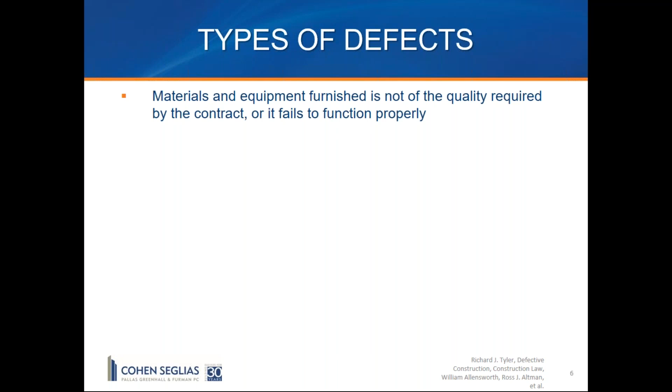All right, so the first piece, what is a defect? We found 5 general categories that we thought capture the different types of defects that can arise. The first type that we saw are materials and equipment furnished is not of the quality required by the contract, or it fails to function properly. So to give you 2 examples, we had a case where there was a performance spec for a HVAC system. When it was finally installed by the contractor, it did not maintain consistent temperatures required by the performance spec. That would be a defect.

Another case we had involved a sewage pump that had to have a certain amount of suction. When it was installed and supplied, it did not have that suction. It was a defect that failed. It was a construction item that did not function properly, and it did not meet the quality required by the contract.

Second type, work is executed in a defective manner. Simply, it was not performed properly. Example of this, floating wood floor. If you're familiar with that, it is not supposed to be affixed to anything aside from the floor itself. Otherwise, it's not floating. Nailed to the subfloor, the opposite of a floating floor. That is just simply defectively performed work.

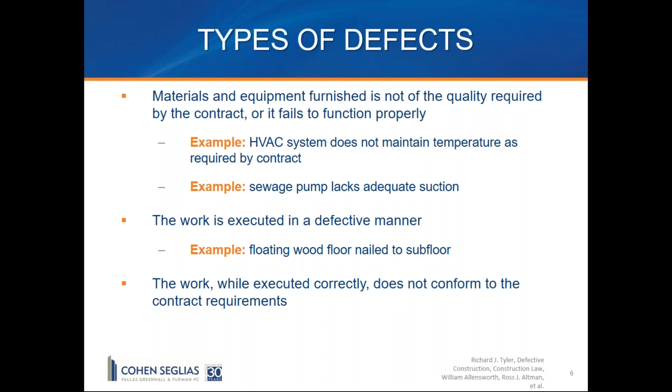Third type, the work, while executed correctly, does not conform to the contract requirements. Kind of abstract example for you. PVC pipes for plumbing. They're correctly installed, they work, however, the contract documents call for copper pipes. I currently have an active case right now where the specs called out for CPVC, and the contractor went and installed PVC. And we'll touch on the implications of that later, but as we sit here, the project and the system is functioning properly, but the owner and the general contractor did not get what they bought. So there's implications that arise from that.

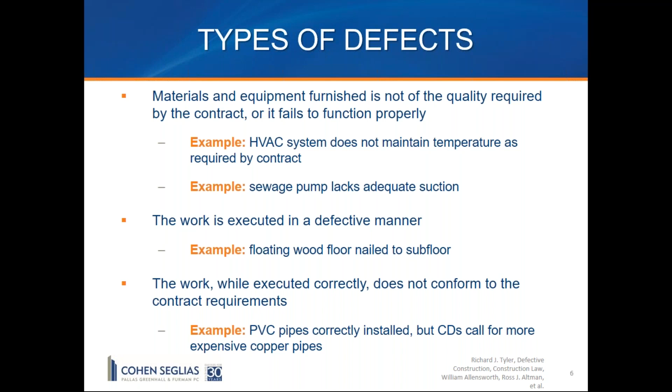And just as an aside, the difference between these types of damages has some implication down the line on, number one, who's responsible for these defects, and then number two, the recoverable damages that are connected with them. And we'll get into all that a bit later. So another type of defect, the construction meets the contract requirements, but it violates building code. So an example of this that Lane has had, he had a client who built totally in accordance with the contract documents. However, the setback requirements were not followed and it didn't meet code.

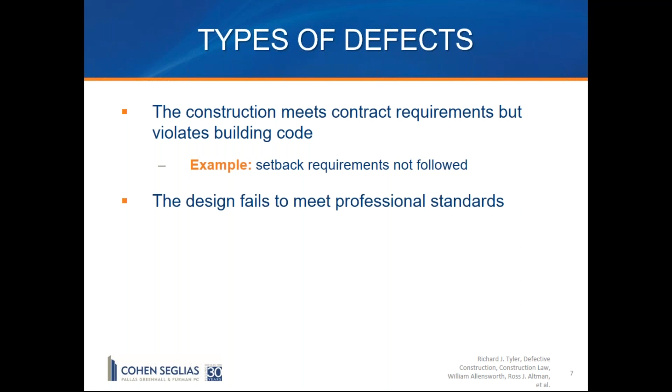And a final defect type, the design fails to meet professional standards. Example of this, the architect or engineer failed to consider the solar loads on the building, which ultimately resulted in overheating. Inconsistent and patchy HVAC throughout each floor of a structure. Now, both of these types of defects are important. It's important because they can in turn dictate the relief that you're looking for.

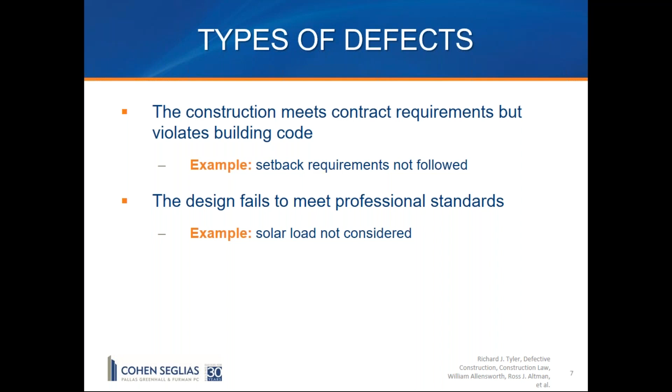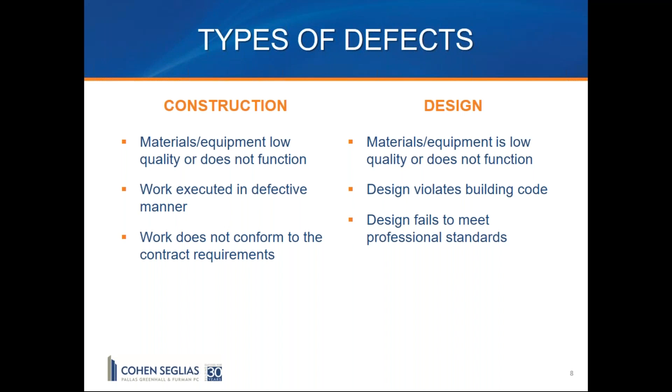When you take a look at a construction defect, they fall within two categories. Sometimes they may overlap a little bit, but in most cases you're going to have construction defects or design defects. When you're categorizing those, you're often trying to determine what the target may be. And the target can fall back on not only the type, but also the relief that you're looking for. So when we get a case or a potential case, we're looking at the type of defect, and then from there, we're trying to understand who are we representing and who is the target.

Now, a very big difference in construction defect cases versus a traditional construction dispute is in the construction defect case, you have multiple players, not only those that may be responsible, but those that stand behind them. And by that, insurers. You don't necessarily need to have an insurance carrier behind you or behind the target, but that's a consideration that should be analyzed and thought through completely. Because depending upon how, if this gets to litigation, one frames a complaint or a counterclaim, you may or may not invoke insurance coverage. Sometimes you want the coverage, sometimes you don't.

As opposed to a straightforward construction dispute, when you're looking at scope of work disputes, lost productivity or delay, there's people behind the architects, people behind the subcontractor or supplier that may be making the decisions as to whether to sign the checks or not. Those are the insurers, the adjusters, et cetera. So there should be thoughtful consideration given when you're analyzing the type of defect as to the type of claim or defense that you want to raise.

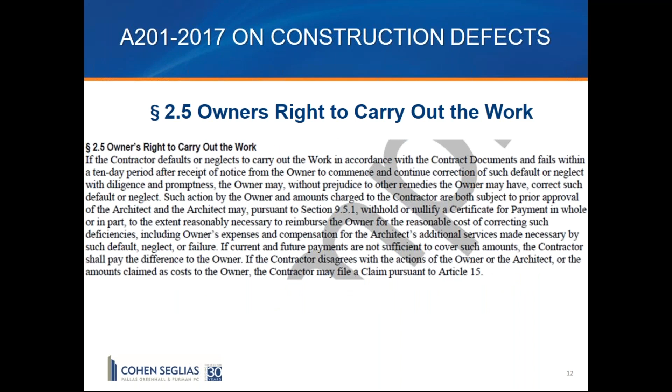There we go. All right, so now that we've covered the various types of defects, we're going to look at defects and how they're treated under the AIA A201, 2017. I'm sure some of you are familiar or have seen this document. So the first section we're going to look at is Section 2.5, which covers the owner's right to carry out the work. And this applies during the project and during the warranty period.

Generally, under 2.5, if a defect arises, the owner has to give the general contractor notice and opportunity to cure that defect. So once the owner is aware of a defect and informs the contractor, the contractor has 10 days during the project to come back and fix that. If the contractor fails to do so, the owner can then take correction into its own hands. The owner can charge reasonable costs of correcting.

That includes the owner's expenses, compensation to the architect for additional services, testing, inspections, replacement, uncovering. It's not limited, but basically anything that was necessary to fix it can arguably be recovered. Including if you have to bring in a third-party professional to do an evaluation or come up with remedial work, that arguably is covered within the AIA A201. And that's important because that would be a professional fee that is recoverable.

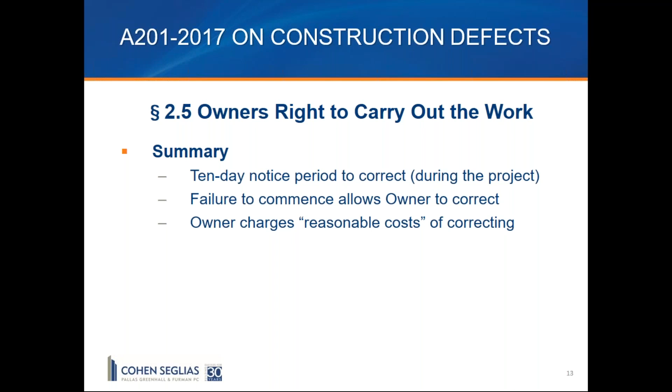Now, notably, the architect must approve those costs, and if the architect does approve those costs, monies can be withheld from the certificates of payment to the general contractor going forward. If there's not enough money to cover it, the owner can pursue a claim for any remaining costs. And if the contractor disagrees with the assessment of how much it costs, the contractor can submit a claim and challenge that.

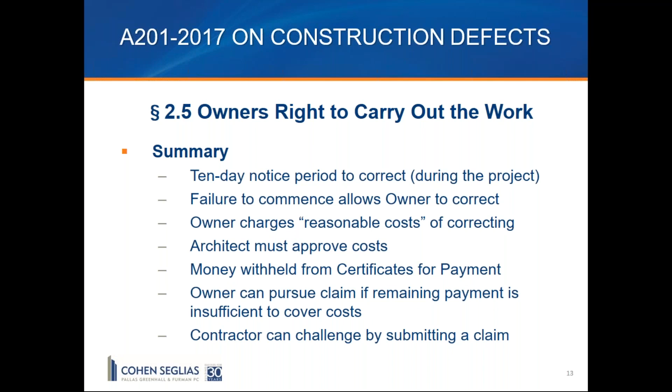Now, as we'll talk about a little bit later, that withholding is important, not only as leverage, but you also need to keep in mind, should you get to the point where there is a withholding, if you're an owner that's making a withholding or a GC that's withholding from a subcontractor downstream, that the withholding is comporting with prompt payment statutes within the jurisdiction you're in.

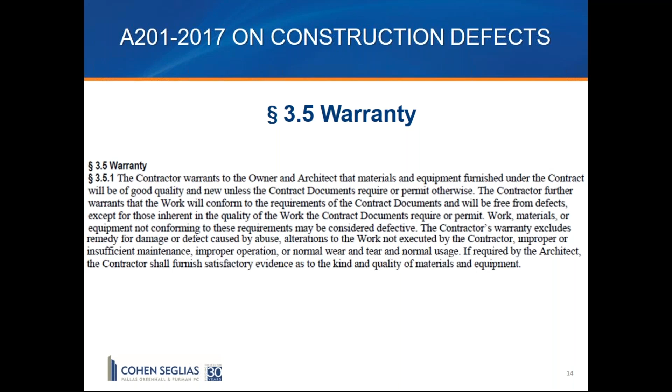Section 3.5 dictates the warranty that the GC provides on its work. It says work's going to be good quality and new, unless otherwise specified. It's got to conform to the contract documents, and it needs to be free from defects. Any work that does not conform to the contract documents is deemed defective. However, any abuse, wear and tear, or owner alteration is excluded, and it will not constitute a defect under the A201.

There's a misnomer that I'm often confronted with when I have an owner, developer, or even a general contractor contact me or contact Matt about warranty obligations. And the misnomer is if they have a warranty obligation under the contract of 3 years and something arises outside of that 3 years, that they don't have any obligation to correct or take that on. That is a misnomer. Let's say there's a 3-year warranty period under the contract. A problem arises year 4.

If that problem is because you did not comply with plans and specifications, that is a breach of contract. And we're going to touch on the implications of a breach of contract and the passage of time in a little bit. But do not think for a moment that if the warranty period expired, you're off the hook. It may take away an affirmative obligation to do something to cure, but it does not eviscerate any potential liability.

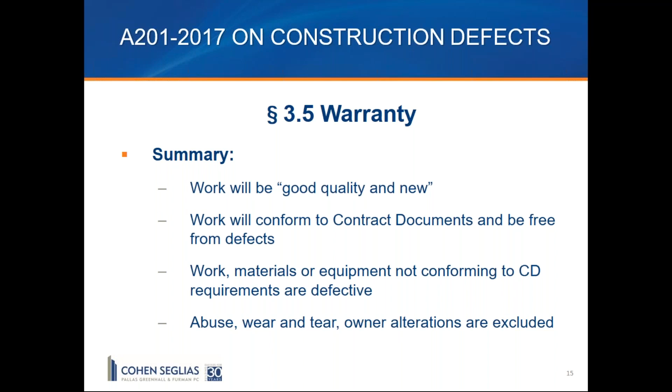So as mentioned, under 2.5, we know that the owner can go back and correct work. And Section 9.5 governs the architect's approval and withholding of money to the general contractor for any of those costs.

As noted, the architect can withhold. The architect has to notify both the contractor and the owner of that amount before going and doing it. So that would give the GC the opportunity to object to that amount. And similarly, the owner could object if the owner feels that it's not sufficient to cover the corrective work. But in most circumstances, I think the owner and the architect are generally going to be in agreement on the amount.

And then finally, the architect may withhold future payments based on issues that have been discovered in the past. If there was an issue at the beginning of the project that wasn't uncovered until towards the end of the project, money can still be withheld. There's no real time limitation on that piece. While there may not be a time limitation, there may be a waiver argument depending upon the situation. Yeah, and whether the owner was aware of that defect.

And just as a side note, 9.5 doesn't limit withholding simply to defects, but it also goes into non-payments to subs, third-party claims, work that can't be completed under the remaining payments left for the contract, work that can't be completed in time and would be otherwise subsumed by liquidated damages. There's other reasons, but 9.5 covers defects.

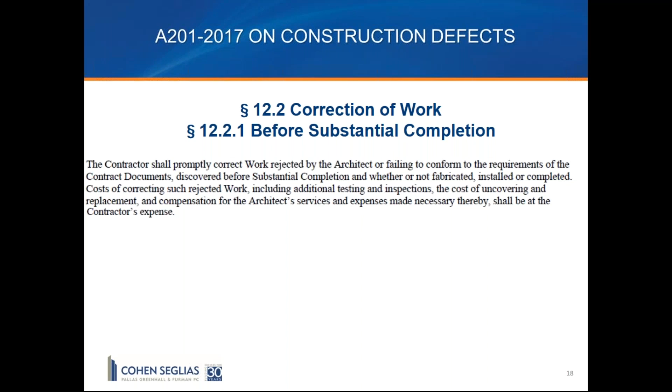So when a defect is discovered, it is going to have implications on correcting. If it's before substantial completion, that is governed by 12.2.1. This is going to be subject to 2.5, which we saw earlier, basically the 10-day notice by the owner. The contractor has to come within those 10 days and fix that work, and the contractor is going to be responsible for the cost of correcting, testing and inspection, uncovering, replacement, architect compensation if there's indeed additional architectural services. Traditional notice and opportunity to cure.

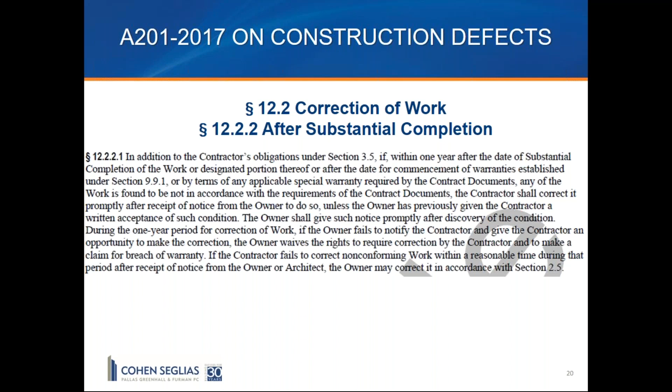Now, if the defect arises or is discovered after substantial completion and within the warranty period, the 1-year warranty period, which is standard under the 201, which can be modified, it can be lengthened, but the standard period is 1 year. If it falls within that 1 year, it's still going to fall under 2.5. The owner has to give prompt notice. Within prompt notice, the contractor has to come out within 10 days and begin work.

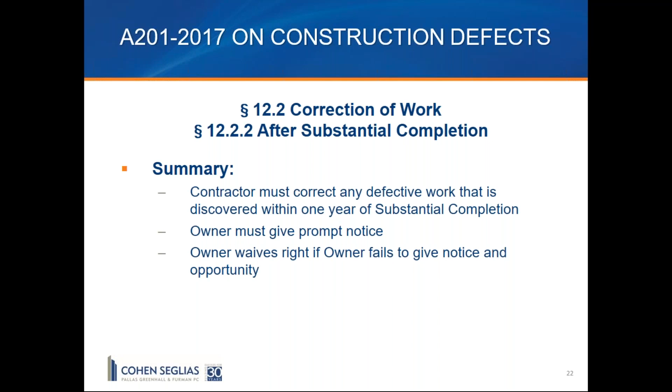This is a crucial point right here. The owner will waive the right to recover for that defect if that owner fails to give notice and opportunity to cure. And that ties into a legal doctrine that we'll talk about a little bit later called spoliation. So if the owner goes and fixes it itself without letting the contractor come out and see it, without letting the contractor have an opportunity to correct at earlier expense, or even having the contractor know that there's a defect in the first place, there's arguably a waiver at play. As well as the mitigation of damages obligation.

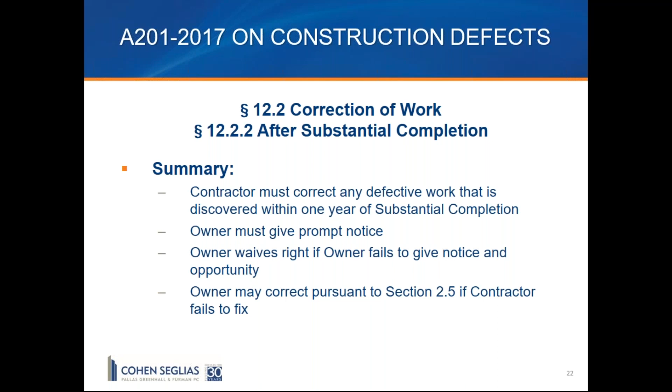However, if the owner gives the contractor notice in accordance with Section 2.5, and the contractor doesn't come out and start work within 10 days, then the owner can go and start the fix. And as we discussed, the contractor will bear the costs. Now, if a defect arises after the 1-year warranty period, then it is subject to a bit of a different treatment.

All right, before we talk about the next slide, which is latent defects, the AIA 201 goes to great lengths to address defects that arise prior to substantial completion, and obligations of the owner and contractor, and defects that arise or you're on notice of subsequent to substantial completion. The theme is the same in both, in that it's addressing the obligations of the owner, should it become aware of a defect, to mitigate its damages and not spoliate evidence. Two themes that run throughout any piece of construction defect litigation.

Now, in the scenario, and we talked about this a little bit earlier, when subsequent to substantial completion a defect becomes known that you did not know about or should not have known about during the course of construction, that is what is called a latent defect. Now, a latent defect can arise after a statute of limitations. So what's a statute of limitations for those that aren't quite sure? In each jurisdiction, there's a period of time in which you can allege a breach of contract action, a professional negligence action, whatever that may be.

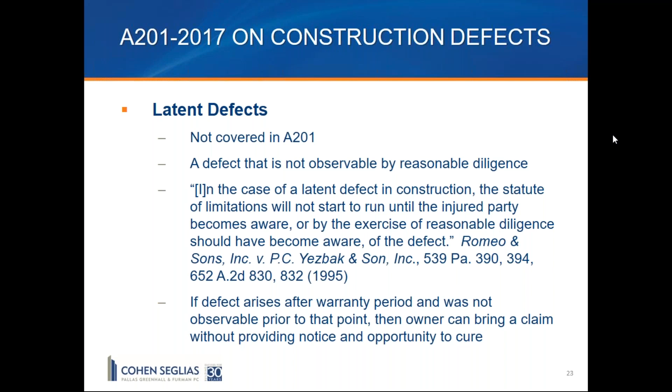If you're an owner and you have a waiver of consequential damage provision within your contract, then you are losing some ability to recover damages which can arise from a construction defect other than simply the cost of repair. Conversely, if you're a contractor, then you are limiting your liability and vulnerability if there is a waiver of consequential damages provision.

Now, the case law, depending upon the jurisdiction that you're in, interprets what a consequential damage is a little bit differently from jurisdiction to jurisdiction. But from an owner's perspective, the standard waiver of consequential damages says that you are waiving lost rental expenses, loss of use, financing cost, income, profit, or even overhead for maintaining those properties.

So if there's a construction defect that arises and let's say you have an apartment building that you cannot rent out and you are losing not only that rental income, but you have carrying costs. The contractor, who is potentially liable, or even the designer, because they have the same provision in their contract, is going to be off the hook for those damages. So if you're an owner, you need to be aware of that.

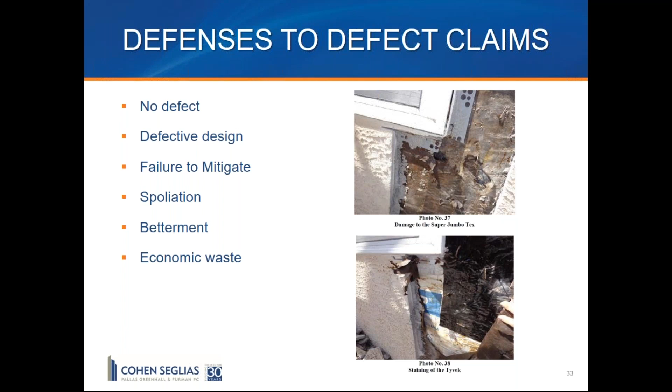So first defense, there's no defect at all. I'm a contractor. I built the building as required by the contract documents. Anything that resembles a defect is not a defect in my work. It is purely a defect somewhere else. It's normal wear and tear. It's lack of maintenance, improper operation. We talked about the sewage pump earlier that didn't seem to have adequate suction. It could simply be the owner's failure to adequately operate it, which is causing something that resembles a defect.

Yeah, the lack of maintenance is one that comes up almost routinely with parking garages, particularly those in the Mid-Atlantic, Northeast region. They should have, at a bare minimum, amongst other things, what's called traffic coating. But if you don't have a maintenance program, even if there's a lack of traffic coating, you're going to get, over time, because of salt that's used to treat ice and snow, et cetera, penetration into the concrete. It's going to cause the rebar and structural steel components to decompose over time.

So when you have a garage failure, a lot of times you're going to look to a lack of maintenance and say, hey, the design was fine, construction was fine, it was a lack of maintenance. Another example, a client, the concrete foundation had some cracks in it, and the owner immediately assumed that there were huge foundational issues, this building wasn't structurally stable. The issue turned out to be just normal settling, no real issue, no defect.

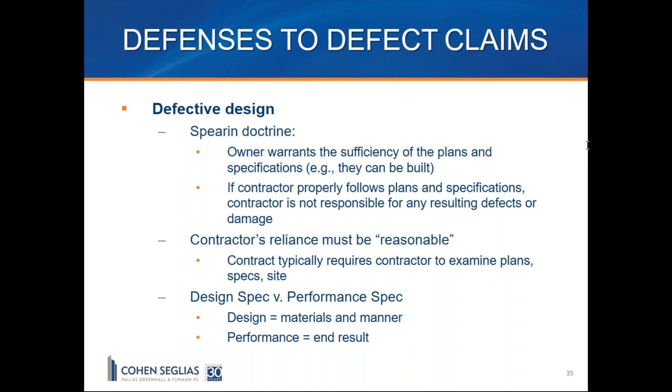Everything we're saying in this presentation is stated generally. Every case is on a case-by-case basis. The facts are going to change, and so do the arguments you can make. While we work within this framework, it's always about what happened on the particular project at issue.

Mitigation. Lane, what is mitigation? All right, mitigation is if you're aware of a problem and you take no action to address that problem, and that problem or the damages arising from that problem grow or expand, then you have breached your duty to mitigate. You have a duty to make a reasonable effort to mitigate your losses.

Real life example: I had a contractor whose scope of work included a green roof. We had litigation with the owner. The owner became aware of water penetrating the roof, pouring down into the building, and didn't take action to address that penetration, no temporary fixes, temporary patches, anything for that matter, didn't take any action to mitigate or even bring litigation for years. So as a result, you had not only the water damage, you had the resultant mold, and what could have and should have been a very small fix expanded to something a lot larger, but that larger cost the owner wound up eating because it did not mitigate its damages.

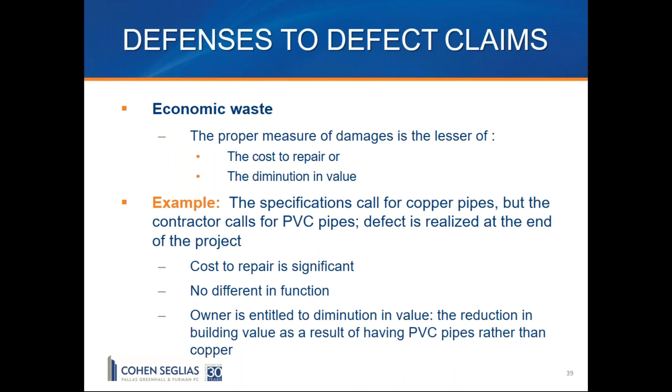To go back to the copper pipe PVC example, if the specs called for copper pipes, but PVC was installed and walls were put up around it, and to fix it would require tearing down the walls, putting in new pipe, and then putting the walls back up, and yet there is no material disadvantage to the function of the pipes in the first place, the pipes still work, then a court would be inclined to say, you are not entitled to the repair cost there. You are entitled to whatever the difference is between those copper pipes and those PVC pipes.

All right, we only have 5 minutes, so let's jump on over to the two perspectives and try to wrap that up. Go ahead, Lane.

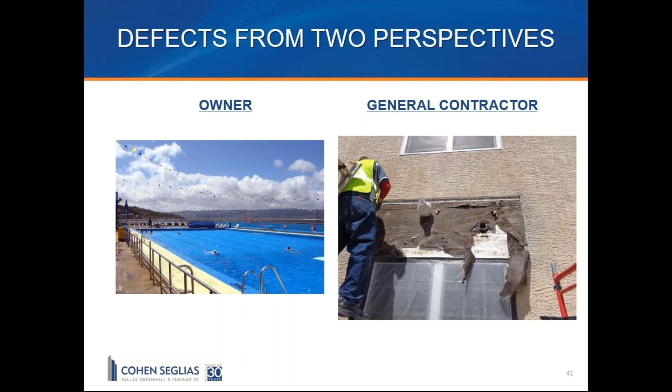All right, so all that leads into two real-life examples that Matt and I have had. One's from the perspective of the owner, and the other one's going to be the perspective from the general contractor. And I'll try to make this quick since we don't have a lot of time, and if anyone has questions, feel free to follow up with either Matt or me. Our emails are on the first slide.

When you have any construction defect, you obviously need to understand what perspective you're coming from. In this particular scenario one, I got a call from an owner who asked me to review a contract, and the contract was for remedial work, because there was punch shear that was discovered of a pool. The pool was set atop a parking garage, and punch shear is a structural engineering term of art. Basically, it means that the structure is shearing through. So the pool was falling through the parking garage.

Fortunately, this was discovered prior to there being a catastrophe. And what the owner did was came to me and said, "Hey, Lane, listen, we found out about this problem. We notified the structural engineer. Structural engineer, in turn, notified its carrier. Carrier came out, did an investigation. They came up with some remedial scope of work. They developed that scope, the remedial scope. They have a contractor ready to go. We want you to review their contract."

Now, everyone here knows that in any capacity, when a carrier is cutting a check, what do they want? They want a release. So the reason why it wound up on my desk was the carrier saying, you need to sign off on the contract and sign the release, and then we're done because we'll fund the value of this remedial contract. So we got to talking, and the owner, after asking some questions, came to the realization that while he'd be releasing the carrier, what if there was a problem with the remedial work?